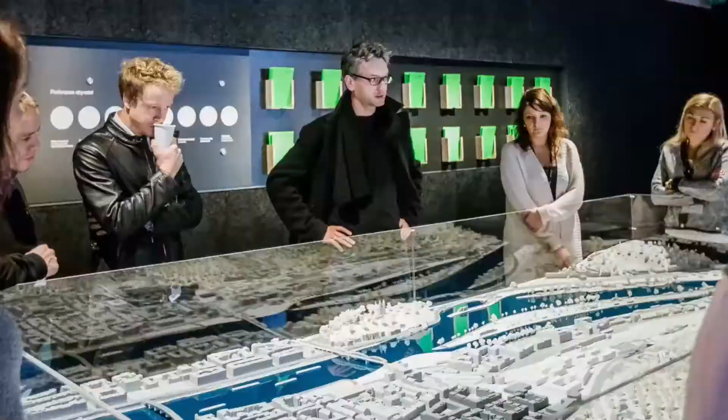Hello everybody, welcome to CAMP, welcome to another episode of Urban Talks. My name is Jiří Jaroš and I work here in the Center for Architecture and Metropolitan Planning in Prague. We have here another episode of Urban Talks, a series that is focused on architecture from all around the world. We are focusing on the projects of architecture studios and architects.

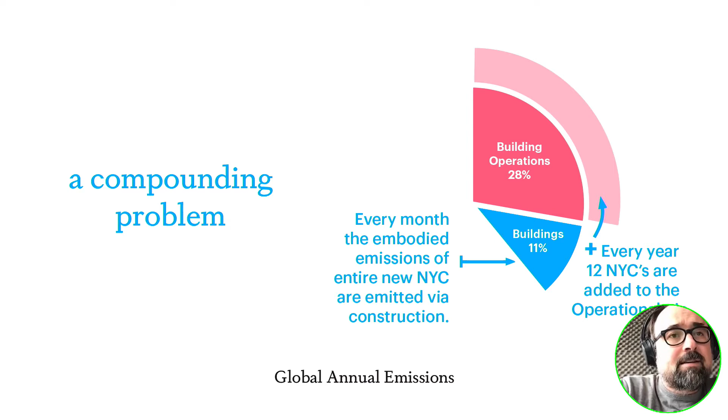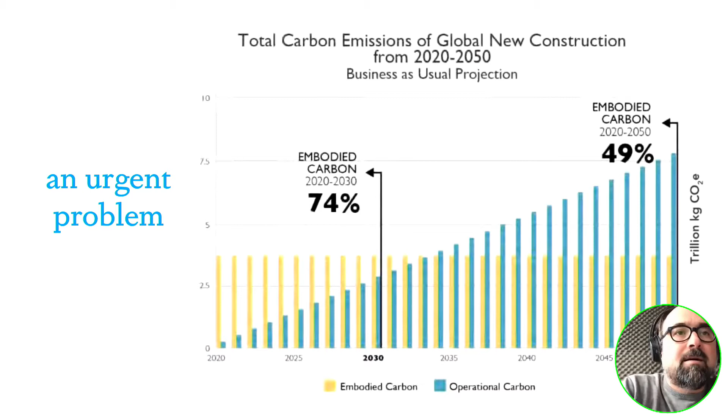It's also an urgent problem because this decade, we need to be really focused on this from a design perspective, because all the emissions that our building stock in the next 9 years will emit will be largely from an embodied side and not an operational side.

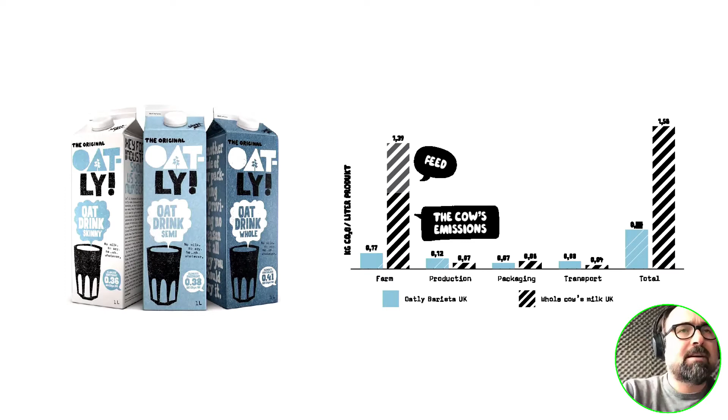We're equipped, I think, from the food culture. We began to see over the last few years kind of literacy around the impacts of our decision making. This is the oat milk I typically buy, and how it stacks up from an emissions perspective against a cow's milk, and where those emissions are happening along the supply chain.

And so now we're really beginning to see a building as a larger set of decisions, of which the architects and planners have the most agency at the cradle to gate and cradle to site part of this. This is before a building opens, before someone comes in there and operates it in a way that you didn't intend. This is where all our agency is.

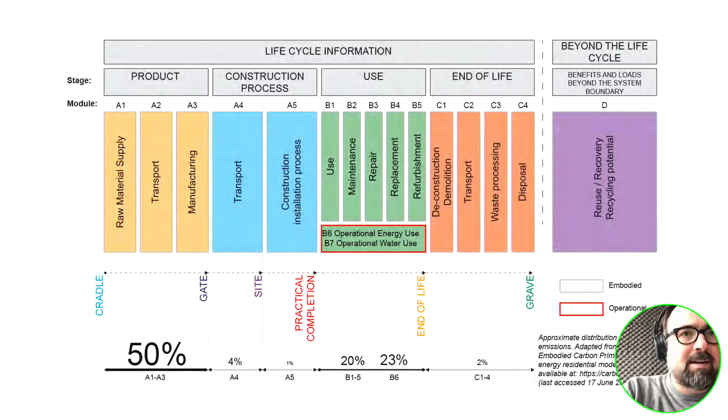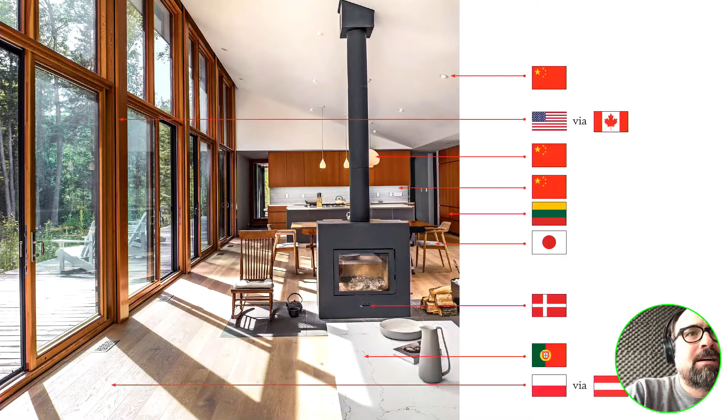And the more I begin to think about the decisions I made 7 years ago, the more I begin to see them in different ways. This is all the stuff that's on the inside of the cottage. None of it really coming from Canada, as you can see. A lot of it coming from Europe and China. From the outside, it's a wood-framed project. The kind of construction is typical of Canada. And I was curious, okay, it's 100% off-grid. That's good. But what is the embodied carbon of this project?

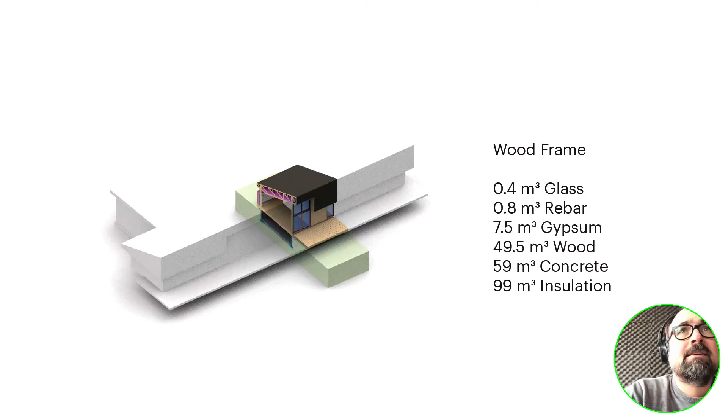And to do so, I began to pick apart this detailed model of the project, really understanding what it's made of, and then ran it through the analysis and found out, wow, this entire cottage is 92 tons of carbon. This is basically 92 of my lifetimes rolled up into this one building for my family, how much I would expend per year through my diet, should I live 92 years. So that's profound as you think about it as an architect.

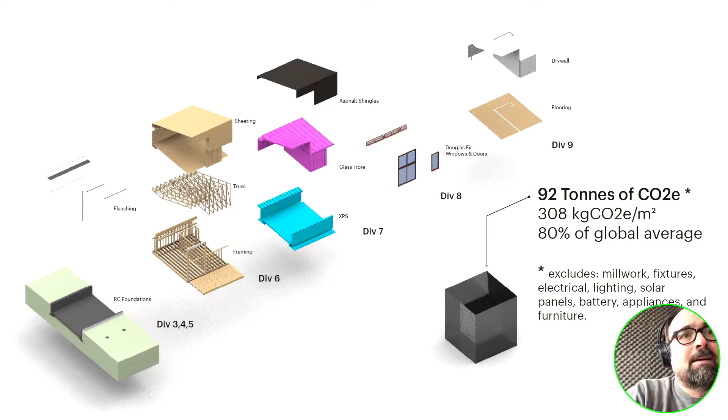And beyond that, only 10% of that was related to its structure. The majority of it was situated below grade in a crawl space that we don't even occupy, and I've come to reflect upon why I made this decision, and what I was taught through my education as contemporary best practice. And beyond that, 58% of it is made up of petrochemicals. This is really a disturbing fact when you think about the insulation to insulate the foundation. There are decisions I made I would certainly not make again.

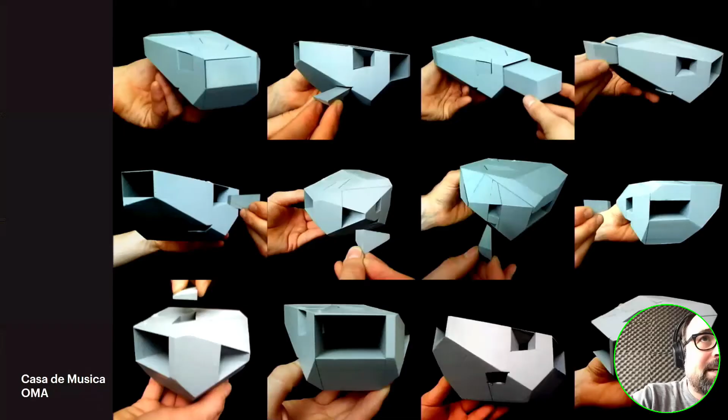And I've been thinking a lot about, when I was educated, a decade or so ago, what were the exemplary projects that I looked at? And this was my favorite project in grad school. And the way that this project was represented, and many of its kind, if you were educated in the 2000s like me, the blue foam model in the hands of Rem Koolhaas here was really symbolic of where architecture was at that point. And blue foam is now everywhere. Like it's penetrated our thinking, how we conceive our buildings, and how we make them.

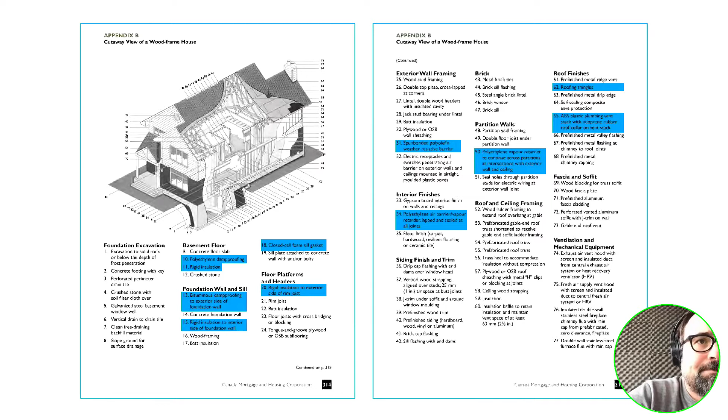This is the Canada Mortgage and Housing Corporation's handbook for construction, where of the 77 layers of a contemporary Canadian house, 11 of them are made out of petrochemicals. When we think about what actually blue foam is, this is blue foam. It's all these things. Sure, it comes with a decent U value or R value, but it also changes the climate, depletes the ozone, contributes to cancer, terrestrial eutrophication, and a host of other things you probably don't want to think about when you're specifying building materials.

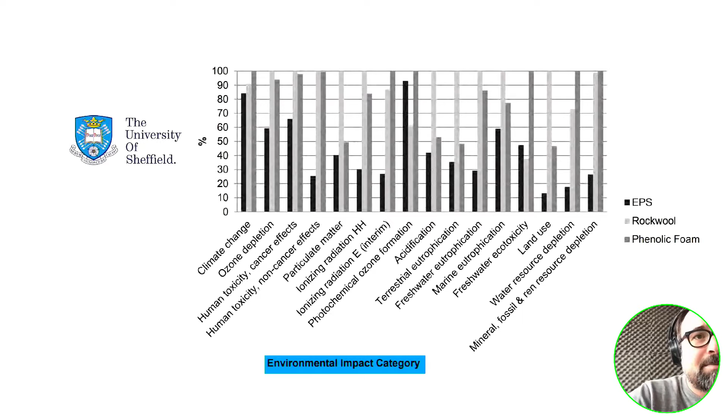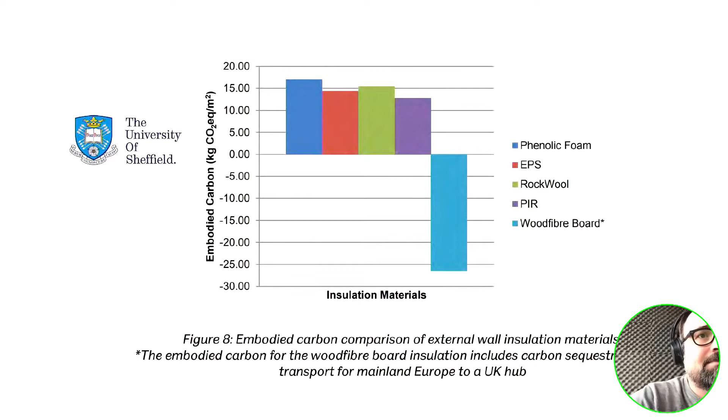And we also know we have alternatives. I mean, this is the kind of amazing thing. We know that there are better options out there, like in this case, wood fiberboard. We just simply don't make the choice or have not been informed to make it. Now, I think at MASS, we've been trying to figure out what is the right language and right way to think about this?

And we look to the food system, good, clean, and fair, and how that applies to building. I'll also talk a little bit about how that then applies to the two simple wedges of that pie, how we address our operational emissions through a return to passive systems, and how we reduce that construction pie with a return to a regionalism.

So good, clean, and fair for architecture. We believe everyone deserves good design. It's a fundamental right that the design is beautiful and just. It is essential to delivering human rights. And it's an essential service. And I think the pandemic over the past year has really illustrated to us the potential for architecture to potentially kill people, right? Or to allow people to get together with confidence. I think so much of our life now is lived outdoors because our architecture has not allowed us to be inside together and feel safe.

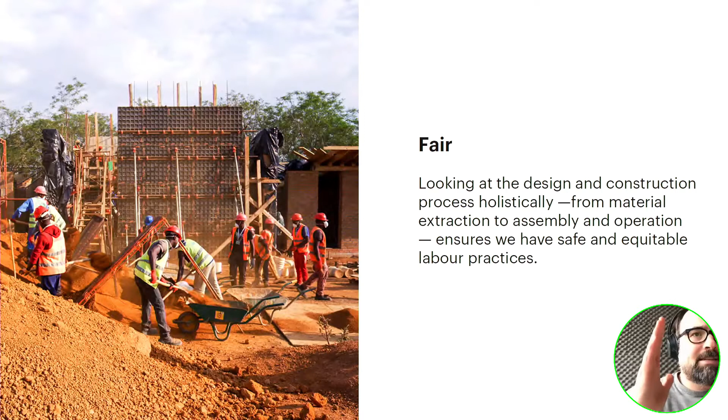Clean, that being climate positive is an imperative. Our projects strive not only for efficient operations, but the design of an entire supply chain to be resilient, restorative, and regenerative. And finally, fair, looking at design and construction holistically from the point of extraction to that of assembly and operation to ensure we have safe, equitable labor practices across the entire project and not just on the site itself. Now, I'll talk a little bit about the passive systems and then focus on embodied for the remainder.

When you think about where emissions live on this operational pie, to break it up into smaller pieces here, there's the direct on-site emissions, the things you do in your house, when you go home, if you've got a gas-fired boiler or stove, your air conditioner leaking, that is happening in your house and you have full control over it. And then there's the indirect offsite emissions. And this is basically, when you flick the lights on and the power, or if you've got your fridge and all the other things that are running in your house, they're inevitably drawing from a broader grid.

And then the question is, how green is your grid? And this is why I think national energy policy is very important when it comes to buildings. And you can see within it, residential makes up more than half of this, and that makes sense. The bulk of floor area is residential, and then the remainder there, commercial and other uses.

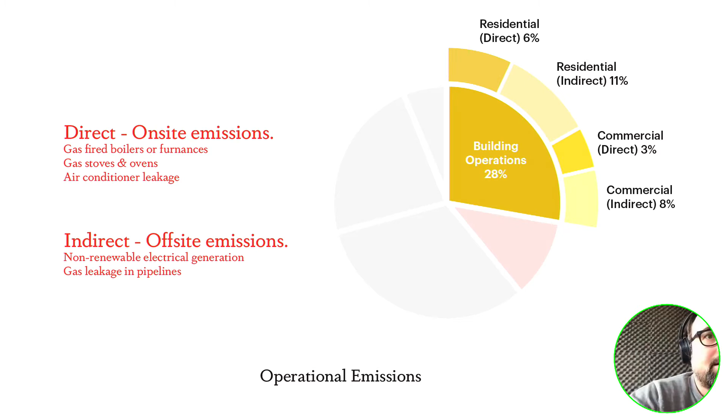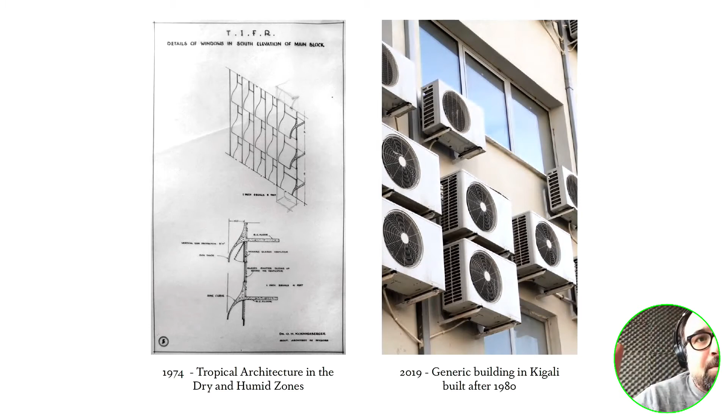And on the left was out of the AA's tropical architecture department, where it was looking at that age of this specific geography. How can buildings be designed? How can their facades mediate temperature and air quality and allow for buildings to breathe? And somehow in this period of time, architects have forgotten everything we used to know. And we've defaulted to sticking all these machines on our buildings, right?

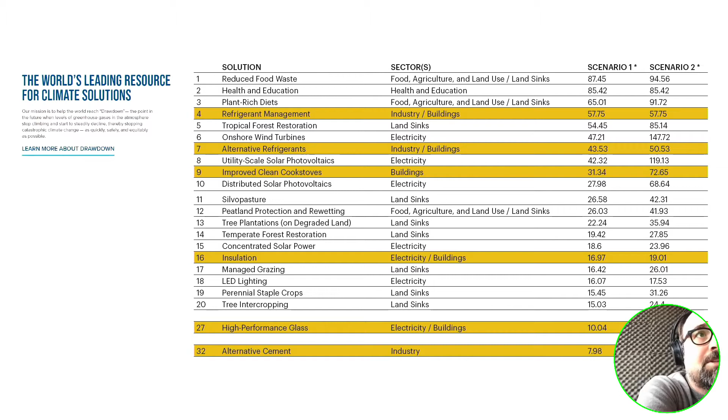This is a big problem because of the knock-on effect of things like air conditioners. This is from Drawdown, which is a pretty well-known publication of how we're actually going to tackle climate change. Refrigerant management is number 4.

And on the success of this project, we were asked to look at 29 other district hospitals. And we said, well, how about we give you some basic standards for these other district hospitals? We looked at all parts of the program and how they should be oriented and organized in the basic flow of patients and staff, et cetera, through them. This was intended to guide their procurement, to help the people hiring the future architects and engineers to say, here's the basic DNA for district hospitals.

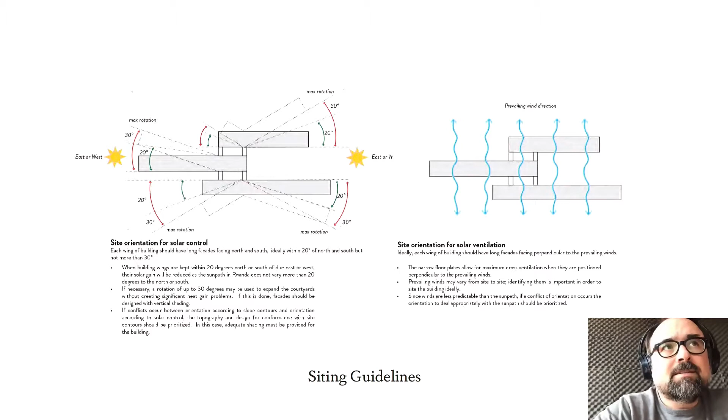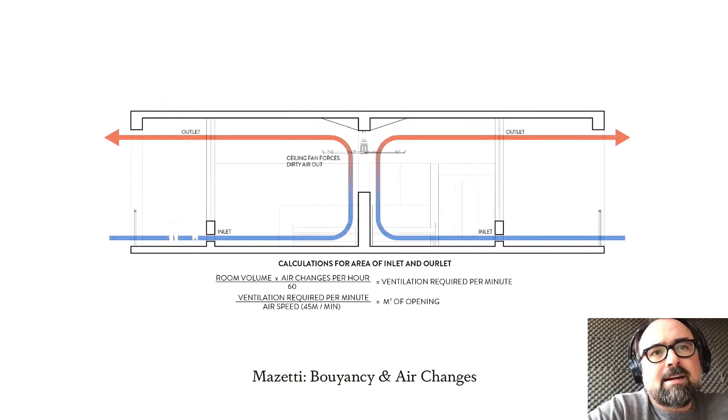So, how to organize to the sun, how to organize for natural ventilation, how to create natural buoyancy in the room and pressure differentials in a facade to get the air changes required in the case of, say, a power outage or not having electricity. And they then all asked us to test drive it.

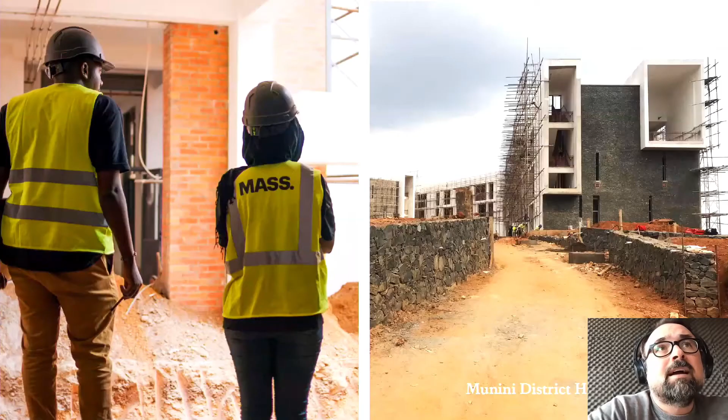So this one actually just opened last week. This is in Kigali, Nyarugenge District Hospital. These are photos from a couple months ago, a kind of proof of concept of this idea. And here's Munini District Hospital, opening later this year in a much more rural part of the country, basically taking this DNA and illustrating what it can produce.

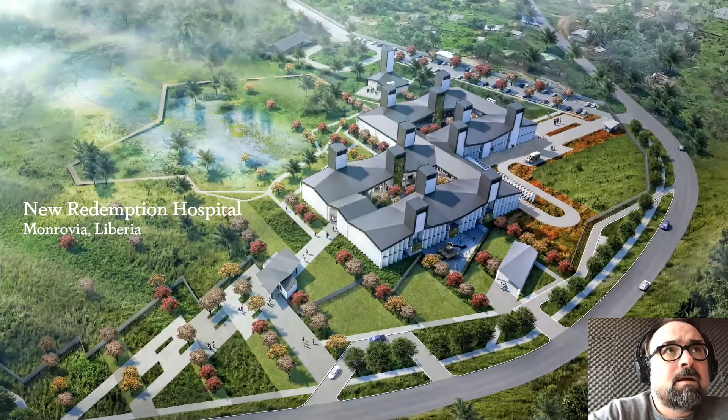We were then asked to come to Liberia, which is a very, very different climate than Rwanda. It's coastal, it's hot, it's humid, and it's very, very rainy. And we were given a wetland for a site too. So environmentally it couldn't be much more different from Rwanda. We had, again, the same basic premise, and how do you achieve it?

And here, working with Transsolar out of Stuttgart, we looked at the same basic first-principle stuff again. Where does the wind come from? At what times of year? How do we orient the building? How do we look at thermal comfort and the range of comfort rather than a specific temperature? How do we make sure that people, throughout the year, throughout a day, are going to be comfortable in a room?

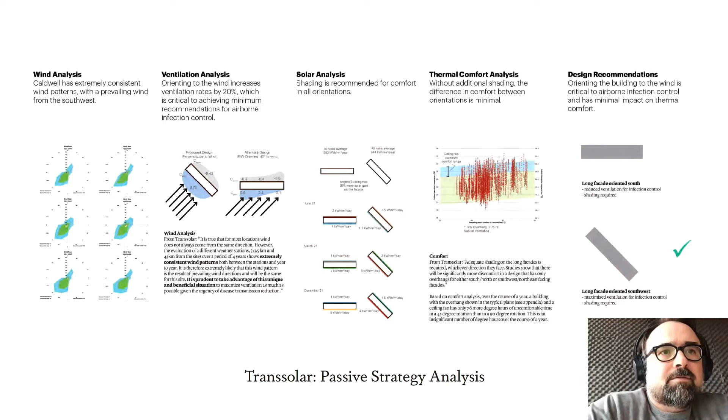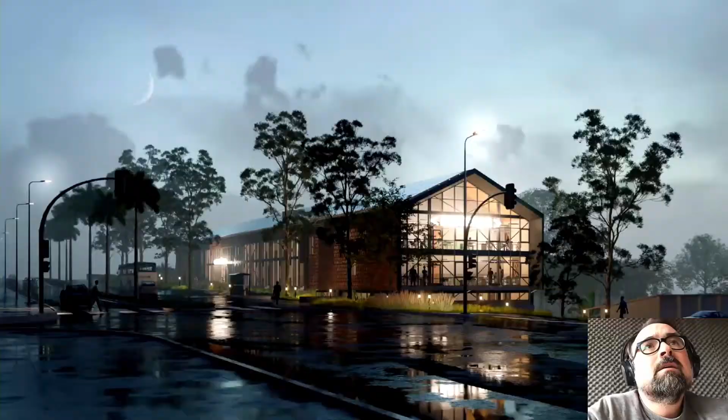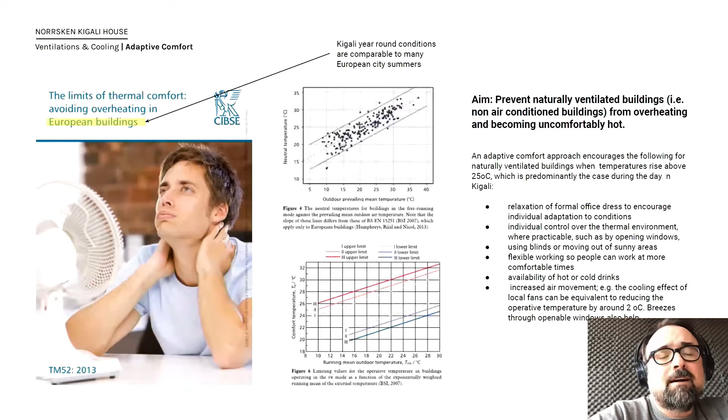Another project in Kigali that's currently going into construction is for the Norrsken Foundation out of Stockholm. It's a new innovator hub. And again, we're looking at how do we declare war on the air conditioner? We go back to first principles. So this is the thermal comfort range of office spaces, specifically the kind of spaces that people need within them. We start looking at what our general thermal cooling strategies are, what we can do through the envelope, through how the space is designed, ceiling heights, and also through the day and the diurnal cycle here.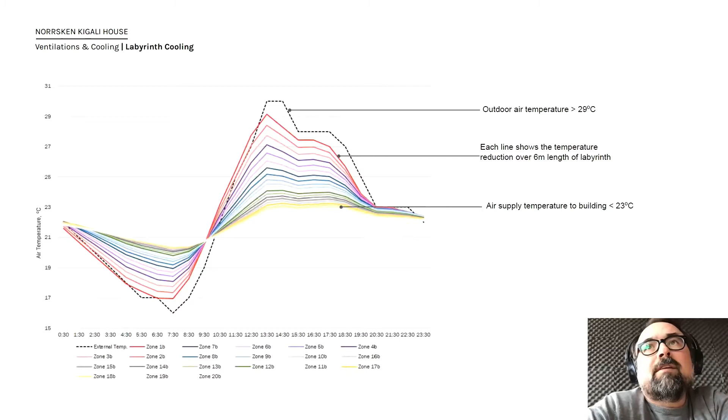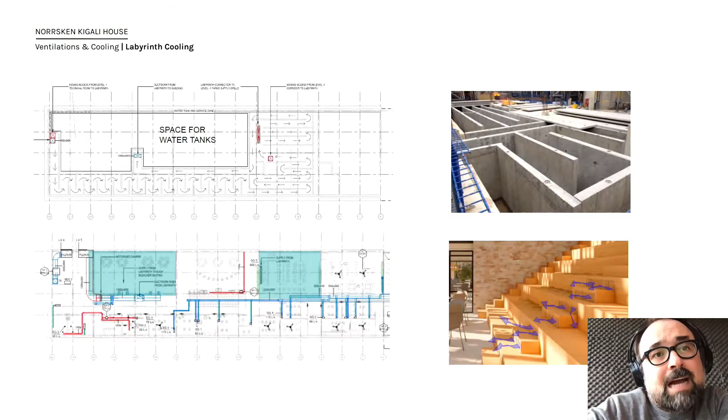At what points can we begin to shrink the indoor air temperature into that human comfort range through design? And ultimately, we went back to looking at the foundations as a way to do it, through this thermal labyrinth where air is brought in through the basement and circulated through the foundation structure, and then it cools off naturally in that underground space and comes up into the building pre-cooled. So natural air conditioning. And looking at the building itself, the cooling system, the air conditioner that is supposed to be on the elevation, is out of sight in the basement.

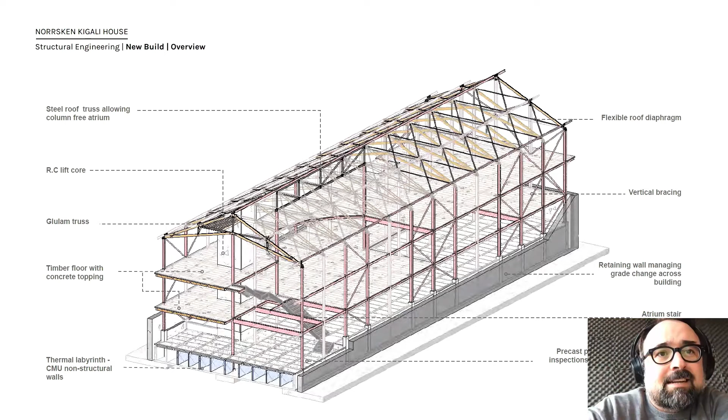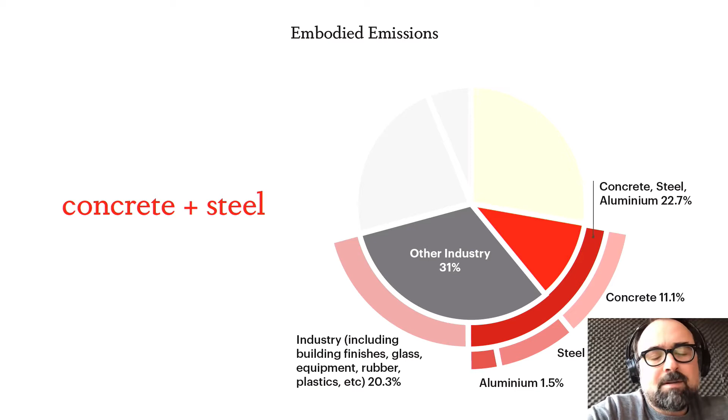The last topic here then will be focused on embodied carbon and this idea of a return to regionalism. So, embodied emissions, that piece of the pie, expanded a bit more to account for industry itself, because buildings are a part of it, but to really tackle climate, we need to look at 3 materials specifically. The first is concrete and cement. As a country, it would be the 3rd largest emitter by itself. Steel, rebar, clearly a big part of concrete as well, and aluminium, which you'll see in some later examples is in a lot of our facade elements in contemporary construction.

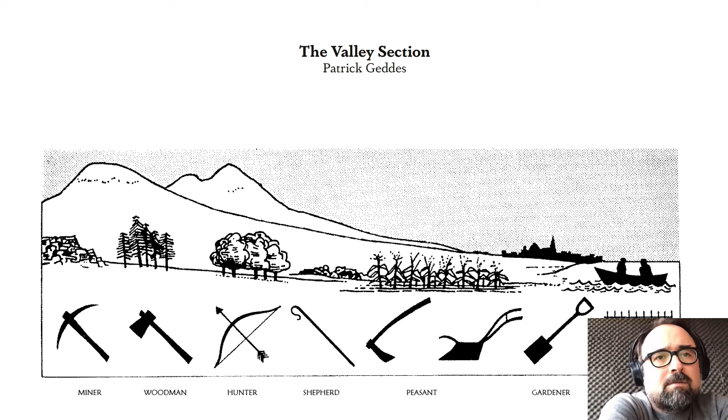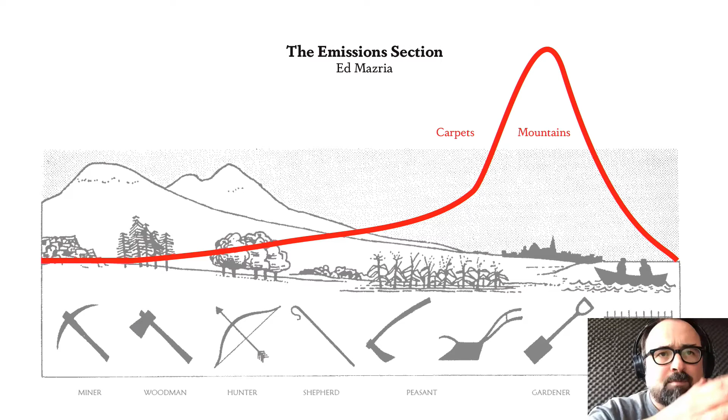Going to update this to Ed Mazria of Architecture 2030's talks on emissions, where in the current emissions profile of buildings there are mountains in our downtown centers, where there's high rises and commercial density, and then it's more of a carpet as it goes out to the residential area. Taking these two things and putting them together, beginning to think about how we actually get to zero: one, we need to green our mountains.

We need to be thinking about how we change how our high rises are currently configured, and really change their use. If you think about it, I live in London, how many buildings down at Canary Wharf have been sitting empty or half empty for the last year, but the lights are still on? That's the emissions mountain. Our carpets, our housing: how do we change our neighborhoods and our current housing to both reduce our operations, but also be greener and potentially a carbon sink?

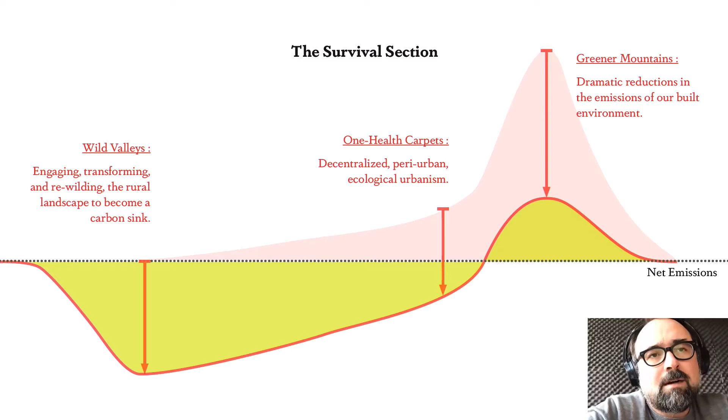And then the valleys: how do we engage the rural landscape? How do we bring back nature to the broader landscapes around our cities? Now, the first project that got us thinking about this is a school in the middle of Congo, the most remote part of the world I've ever been, where to get there required you to take 3 flights, land on a grass strip, and sit on the back of a motorcycle for 4 hours through the jungle where the path is about as wide as your shoulder in parts. So from a constraint perspective, you could not ask for a better project.

It resulted in thinking, while we're building this school, getting materials here is incredibly difficult. So we want to make sure that what we leave, the people can repair and maintain and learn from, right? So we spent 2 weeks there talking to them: what do you work with? What materials do you use? What are your skills? And then took a bunch of materials back and tested them in the lab to figure out the right building materials for the school.

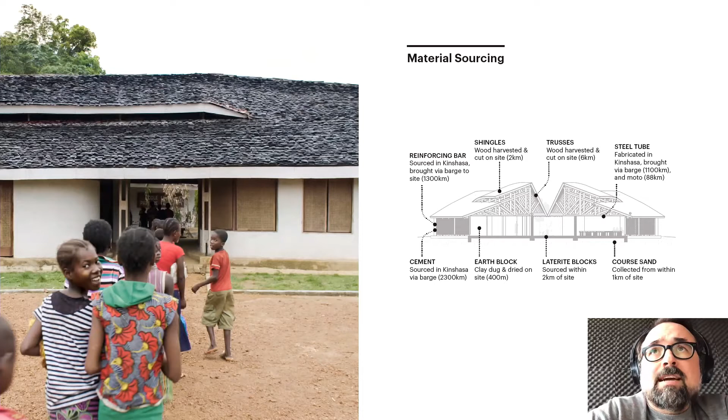Here you can see what we did use: we brought in some cement, some tools, some nails and screws, but most of the project was harvested within 10 kilometers of the site itself. Of the species of wood that we found, a lot of them hardwoods, we did a lot of studies, and we found that one in particular was perfect, had a lot of tannin, like a cedar, for cedar shingles, which you'll see in a second.

These are hand cut, on-site fabricated trusses. Here are the shingles I mentioned, which have that same character as cedar. So in the event they need to replace the roof, they throw on another shingle as opposed to waiting for some sheet to show up months later. And the impact of this from a socioeconomic perspective, in a country notorious for a lot of the money funneling its way to Kinshasa and a few pockets, is that the bulk of this project was spent immediately locally, where 84% of the construction budget made its way into that community.

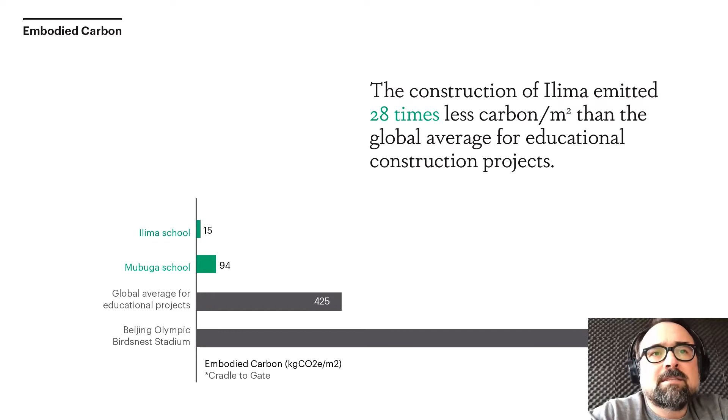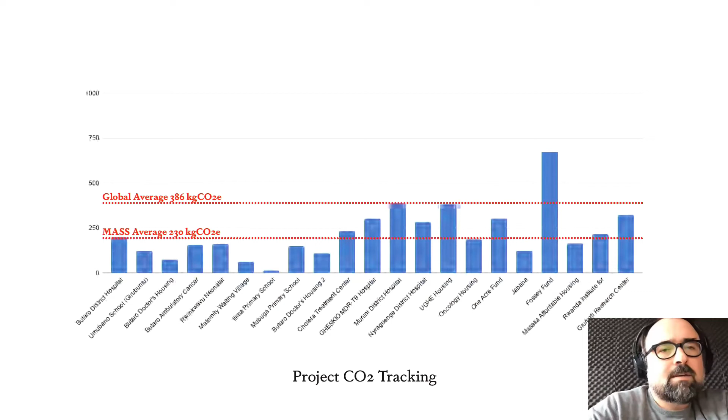From an embodied carbon perspective, as a result, this project is embarrassingly skint compared to the global average, with the Beijing Olympic Stadium put there as a comparison. And it makes sense: if you're building out of mud bricks and wood, it ought to be quite low, right? The source here was the cement and some of the foundation mortar. Out of this, doing some work with MIT at the time, we began to look at all our projects. How are we doing across the board? How can we improve? Which projects have performed well, and which have not, so that we can learn lessons to apply on others?

Now, the project I've been focused on for the last couple of years is the Rwandan Institute for Conservation Agriculture, where this has been learning from Ilima in many ways and trying to figure out how to take these lessons at a much bigger scale.

The first thing we did was, okay, how do we reduce carbon radically in this? And the biggest savings was going to stone foundations, something I've thought about a lot since. Like, why do we just assume foundations need to be cast concrete? We've been building out of stone for centuries and centuries. And then suddenly in 1930, we said that's not good anymore. So by going back to stone, it had the biggest profound cuts in the overall embodied carbon.

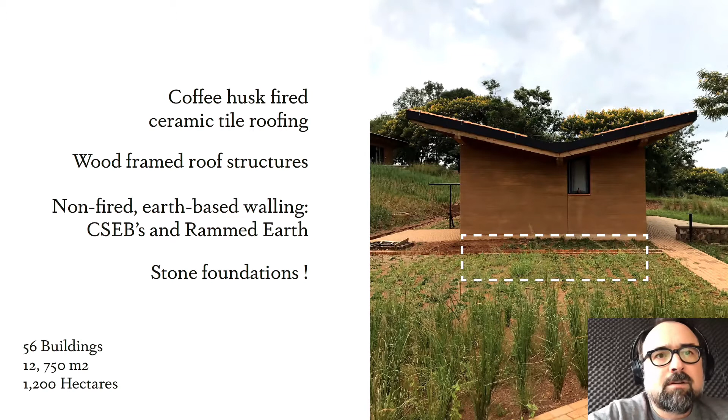Wood framed roofs, coffee husk fired ceramic roofing. This is an architecture literally harvested from the site. Our engineering team spent time, for the rammed earth and the earth blocks, digging holes on site, finding the right mixtures of clays and soils to get the recipe right, so to speak. So this is all on-site sourced material, and then they're kind of testing here.

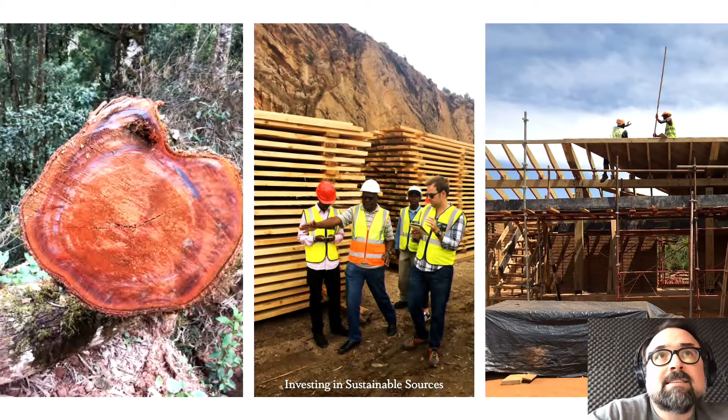We're working with a few lumber suppliers across Rwanda and Tanzania, like what species do they have? What dimensions can they cut? What's their drying time? To think about how we design around the constraints of the supply chain as opposed to the other way around.

And from an EPD perspective, these are environmental product declarations. This is a Swedish group that does a few of them. And you can see a lot of our projects are in parts of the world where these do not exist. So these are the coefficients that you assign to a material to figure out your footprint. So, in the absence of data, we've been working with our manufacturers to create the data.

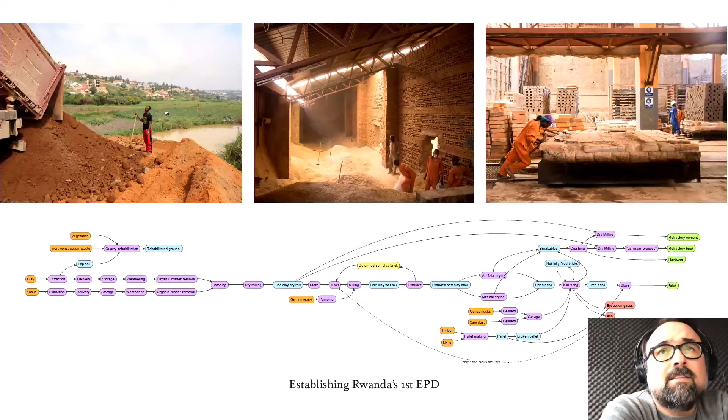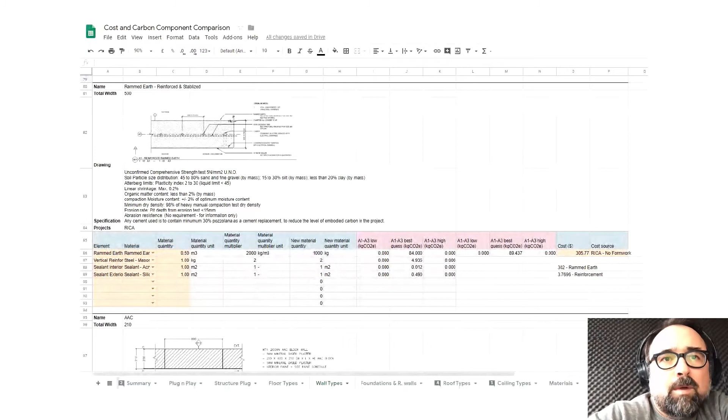And so here is an overview of the supply chain of Ruliba, the big ceramics company we've engaged in this project, and others to understand their whole supply chain and where emissions happen across it. And then take this and roll it into our own little custom spreadsheet to think about how then we can bring this to other projects and get everybody thinking about this on the design team.

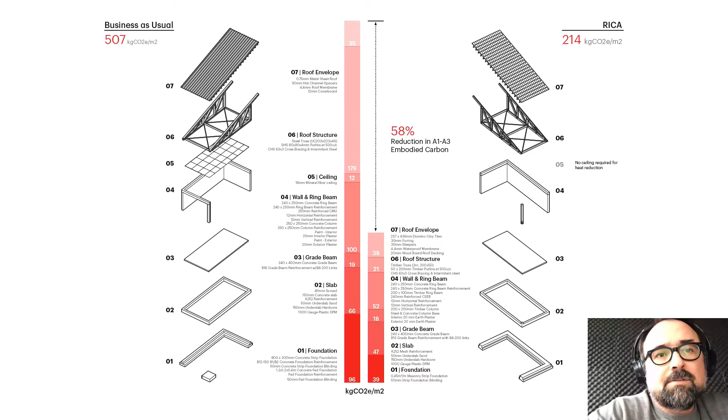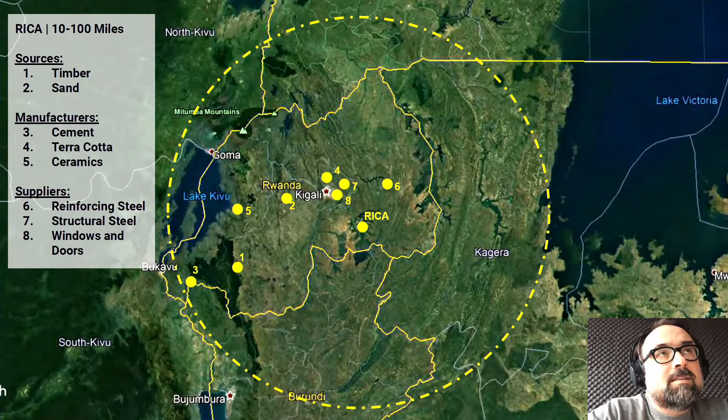96% of this project's material are extracted, harvested, sourced in Rwanda. And Rwanda is the size of the Netherlands, for context. Within a mile, we got all the big heavy stuff, the soils, some of the timber, the water that we're using. Within 10 miles, the stone, the aggregate, the sand. At 100 miles across Rwanda, we're getting into things like the cement and terracottas that you saw before, and some of the other items that we could specify in country.

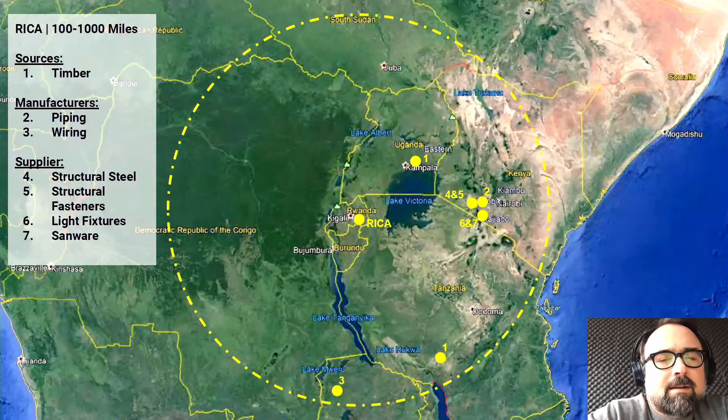At 1,000 miles, this is where we're reaching out to Kenya and Tanzania and Zambia for some of the wiring and hardware. Things are not manufactured in Rwanda. And then finally, globally, we're having to go to China, the Middle East, and Europe for things like the wastewater treatment plant and the solar PV.

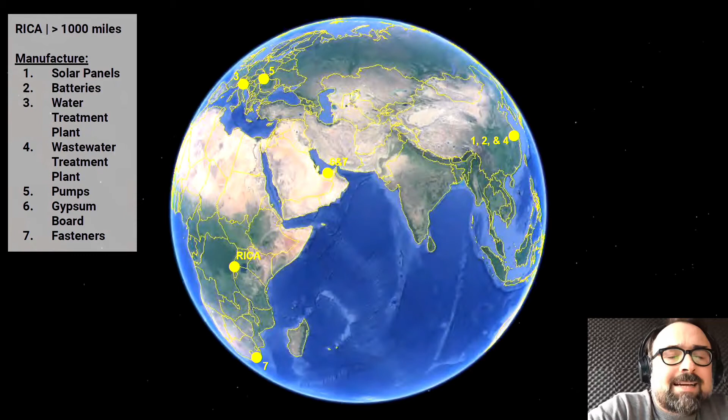98% of the labor sourced within 100 miles. So of a $60 million capital project, again, this is how to make sure that you're having impact. Looking at that, we hired basically every able man and woman in the district through this project, through the construction. At any point, we've had upwards of 900 people on the project site at a time.

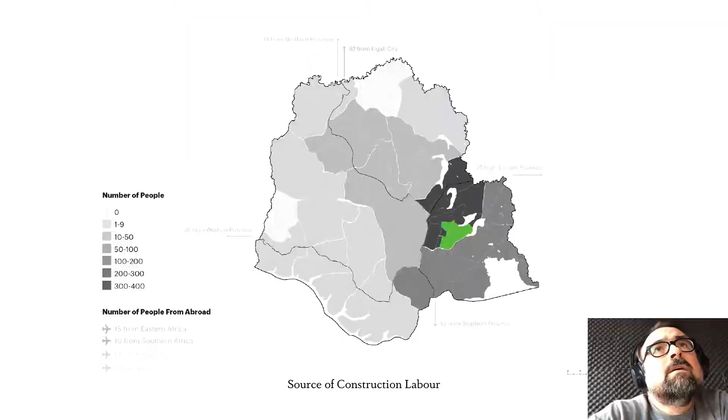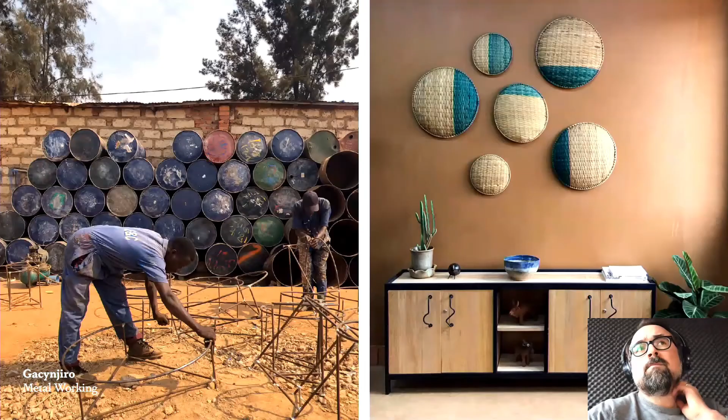We reached out to the metal workers to do custom little hardware details and frames and things for the furniture. And finally, we made our own wood shop. We hired a couple carpenters to do a lot of the desks and chairs for this university. So here you can begin to see what it looks like on the interior.

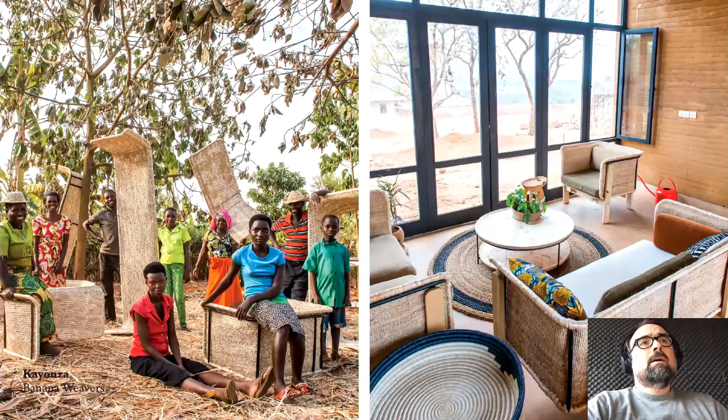And this is a banana weaver cooperative. So banana fibers, there's a lot that comes off the plant besides the banana, more than the bananas, and taking this and incorporating it into the residential furniture suite.

To think about, okay, how do we get to net zero? How do we actually get to climate positive? We've been working with Atelier 10 out of London to think about what the total footprint is. So we had a good sense of what our buildings were. We have a good sense of what the infrastructure is, and that's all of the carbon associated with the construction of the roads and the solar PV system, the landscape, all of the paths and the stone and the things that are laid into the landscape.

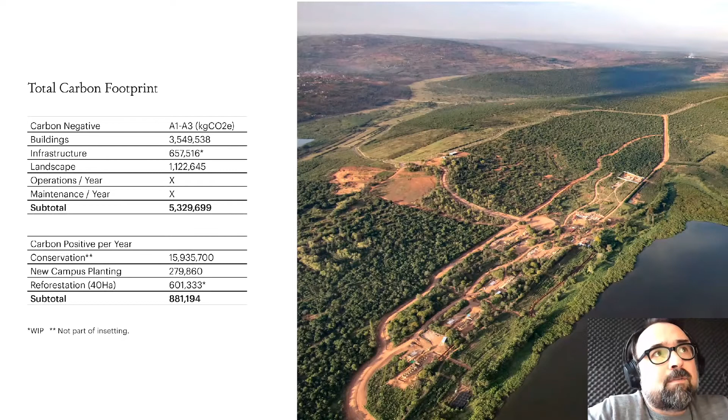And then because the campus is entirely off-grid, the operations budget is basically zero from a carbon perspective. It's a completely off-grid project from both a power and water perspective. So we have the benefit of 1,200 hectares to then think about how do we get positive. And we're developing a reforestation scheme where we plant 40 hectares. And over this decade, think about how do we get to neutral and how does it become positive thereafter.

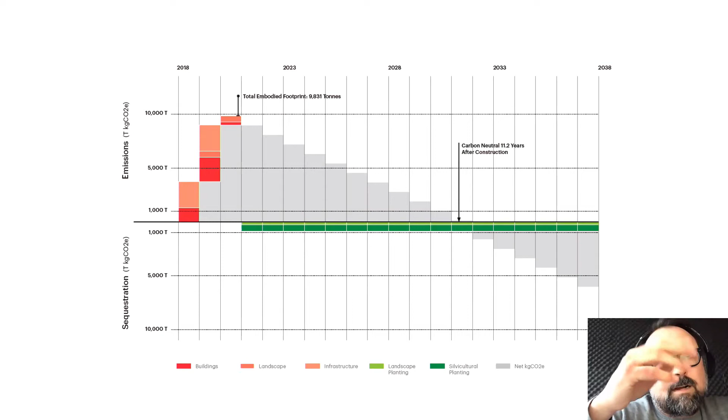So here you can see this kind of stacking of the footprint in the positive direction through the phases of the construction. And once the reforestation scheme kicks in, per year, you begin to sequester a certain amount that takes that down and steps it down. And so this, albeit on a project site where we have the area to do it, this as a diagram is really how I think we need to be thinking about architecture and finding that green space and developing relationships directly to it, and not some abstract offset that we spend $5 on, but actually figuring out exactly where that's actually going.

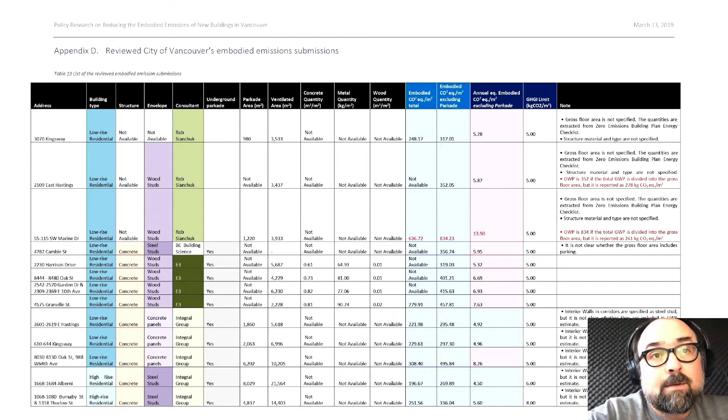What Vancouver did in 2018 is basically go out and produce a benchmarking study. It looked at 50 or so projects built in the city, to answer the question, what are they building right now? Like, we need to get to half. Okay, what are we doing today? Right? We need a target to measure against.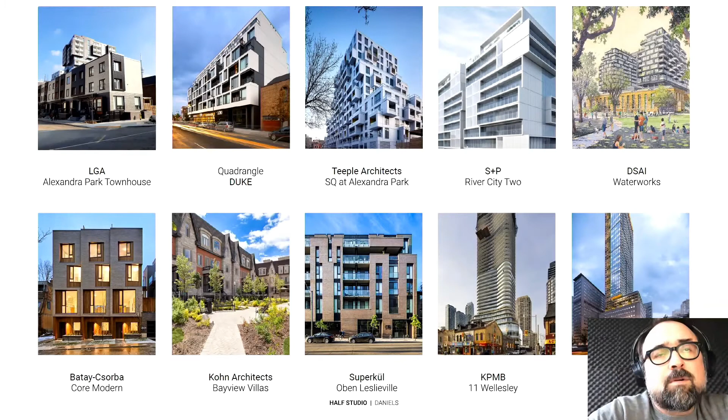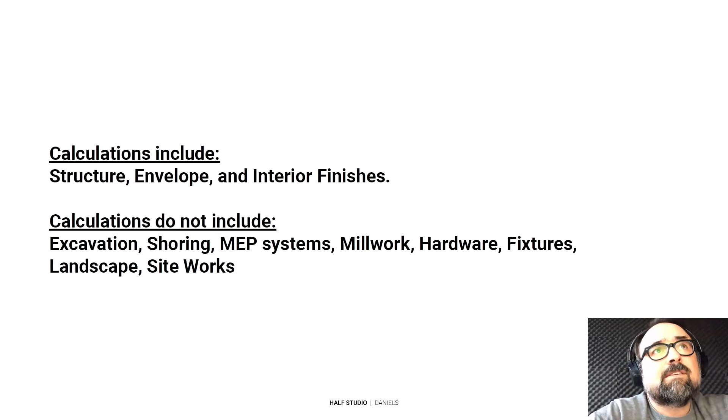So I enlisted 10 firms in Toronto to offer contemporary projects, either in the ground or recently completed, to answer that question, what is right now, so that students can then understand where they're moving from. We worked with them to develop full bills of quantities and pick the buildings apart. So the calculations include the main things like the structure and the envelope, interiors, but did not include MEP systems and a number of other things.

So it's an incomplete accounting. But the results were really interesting. I'll be sharing this with the City of Toronto and Canadian architects. And it's a kind of form of construction I can't imagine is all that different from Czech. So we found that the low-rise projects built out of wood frame were roughly half per square meter of the projects, mid-rise and high-rise, built out of reinforced concrete frames.

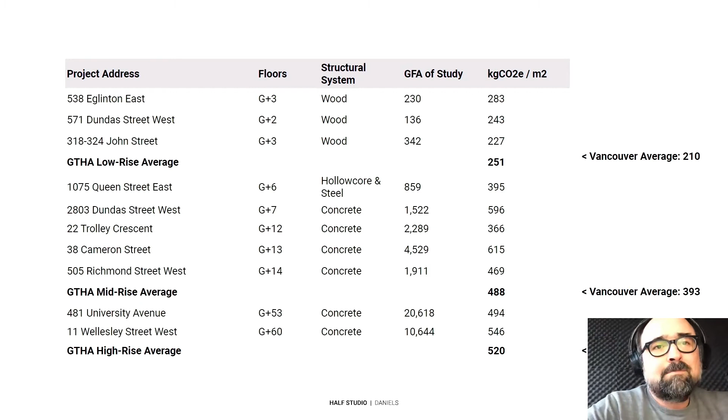So if there was something you wanted to do right now to save the world, it'd be like, build more lighter, lower buildings. That would be a kind of simple thing based on the technology we have. And kind of getting into the weeds of it, the key findings, which I've shared with the city and am now going to share with the broader country and now sharing with you, are like four main drivers we should look at from a planning perspective and as designers where we can focus some attention.

And the first is carbon intensive structural systems. This is really straightforward: cast in place reinforced concrete, because of cement and because of the rebar in it, is a huge driver of emissions in all these projects. And like I said, the lower rise projects that had wood frame had roughly half that of their counterparts. So, I recommend talking to your structural engineer, thinking about how to make your buildings lighter, reducing cement as much as possible, and looking at alternative structural systems. We're talking a lot about mass timber these days, and this is one of the reasons why.

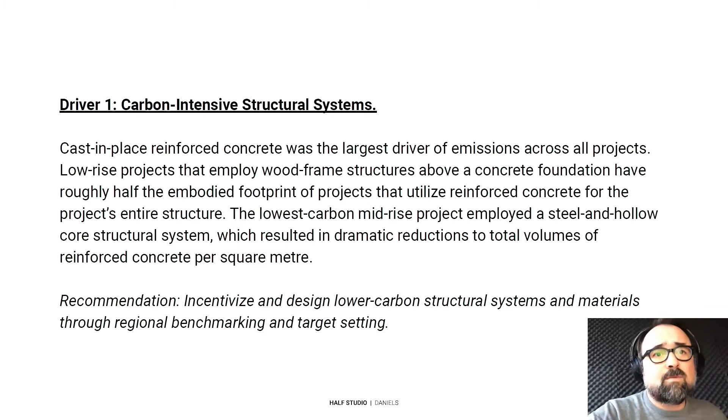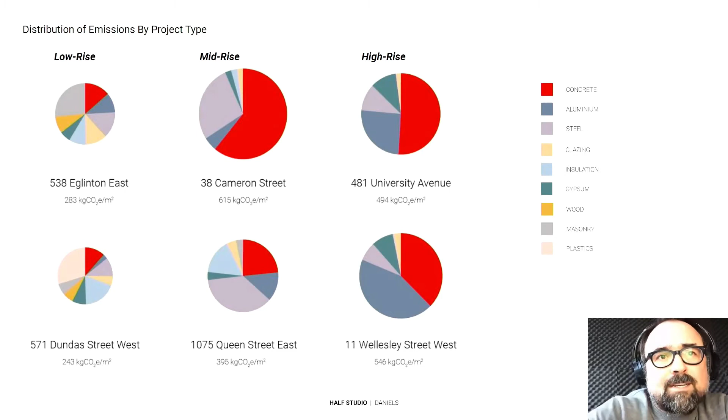Looking at a few of the buildings and proportionately where emissions live, and you can see, we'll get into a few of these here, but the concrete, that red, it sticks out at you. You can see, in a couple of these projects, the one Cameron Street project, the majority of the project is concrete. After that, aluminum and steel, and also in some smaller projects, insulation.

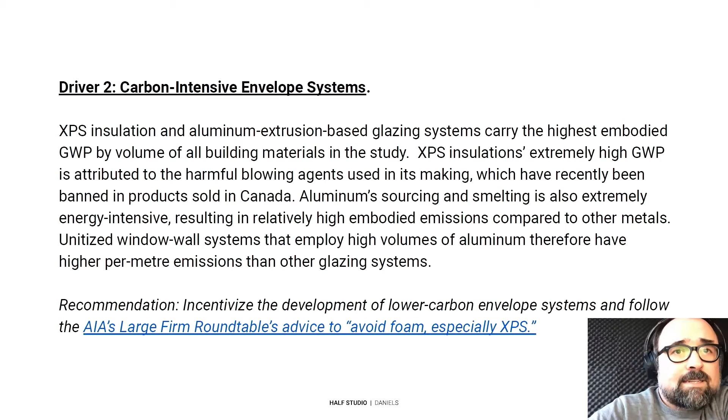As architects, we are completely in charge of envelope. So envelope systems are a big source as well. And so XPS insulation, the North American versions of which had been abhorrent until recently in Canada, when the laws were changed to follow more European standards. And aluminium wall systems. So there's a lot of window wall systems in Toronto and Canada, and curtain wall certainly uses a lot of aluminium. So the sourcing and smelting of these materials is energy intensive, albeit they could be recycled, but they are a problem from an emissions perspective. So, the recommendation is, get this foam out of your buildings, find organic sources for thermal comfort, for insulation systems, and let's figure out ways to cut the amount of aluminum in our wall assemblies.

Subgrade floor area, and this is probably more for the planners in the audience. I would love to know what the parking requirements are in Prague or in the Czech Republic more broadly, but Canada has this fascination with digging basements. I grew up with a basement. I just thought every house had a basement until I moved to London and realized no one really has them here. But foundation works and parking structures and anything that's been pushing people into the ground architecturally in Toronto is a huge, huge source of emissions.

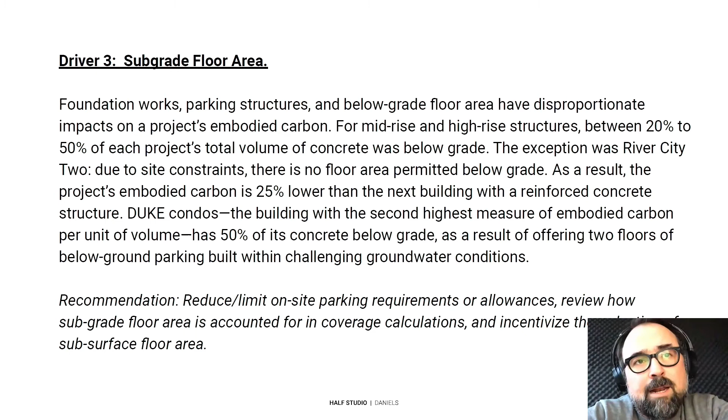This is largely due to on-site parking requirements and floor area ratios. So I imagine there might be something similar, but basically in Canada, any floor area below grade is not included in your FAR accounting. So you can go as deep as you want, kind of, without being penalized. It costs more, but that's typically where people put their parking.

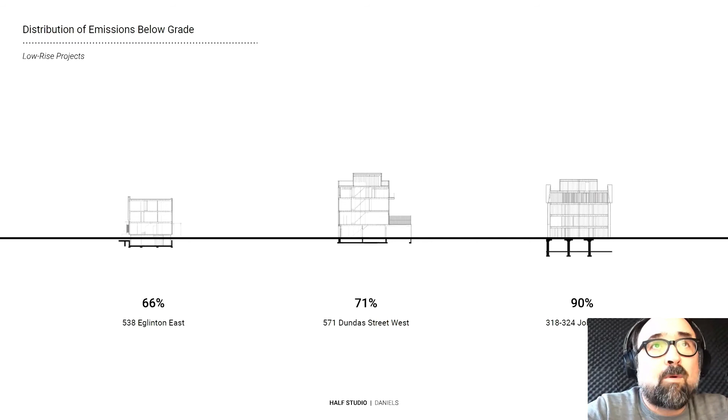Now, looking at a building from an emissions profile, what's interesting is these 3- and 4-story wood frame townhouses. The bulk of the emissions are all in the foundations, these concrete foundations. Again, it's disproportionate. It gets even more out of whack at the mid-rise, in a couple of these projects here where the soil conditions are a bit more difficult, where half of the emissions are in the parking garage for a 7-story residential building, right? Where just to house our cars, we're emitting just as much carbon as the house itself.

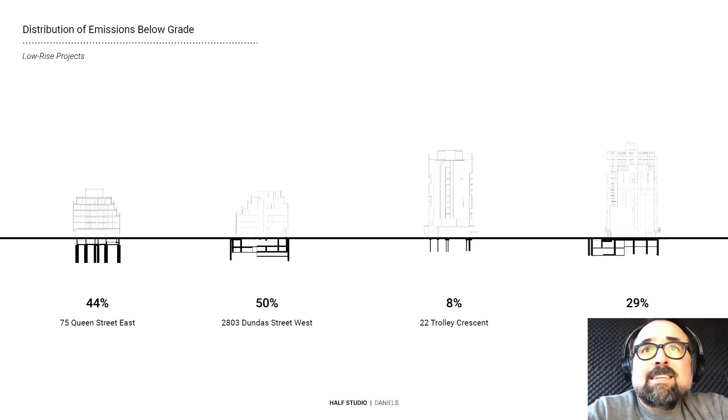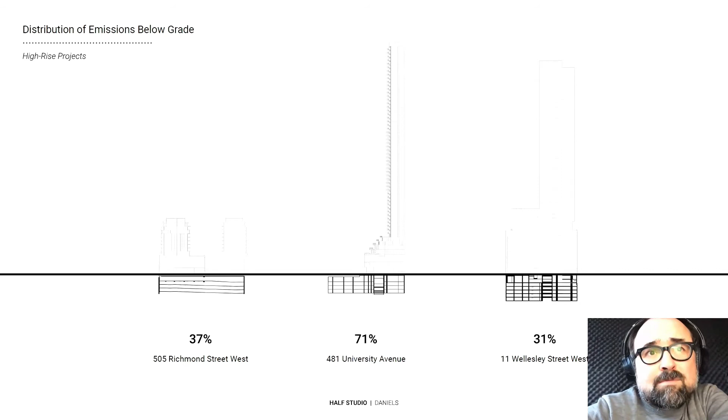The one project that didn't could not go down for some site constraint reasons. And then the high rises, again, you see these large parkades below ground to accommodate all the units above ground. And from an emissions perspective they are kind of icebergs.

One student was just like, well, I'll just get rid of the parking and we've met our 2030 targets. And she was pretty much right there. So that would be the easiest thing to do.

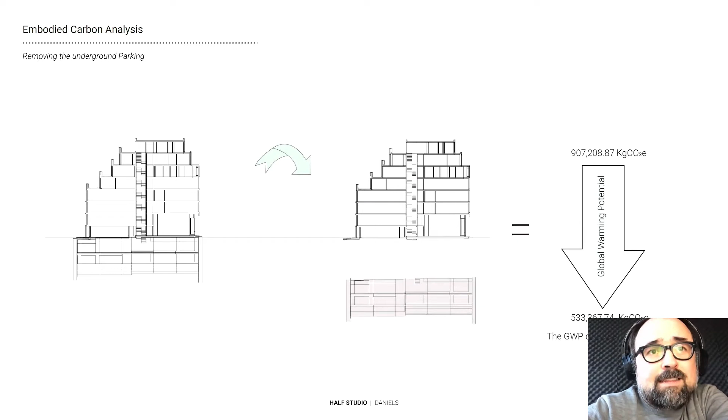And the last is the dimensional impact of parking, which is, the parking grid does not necessarily match up to the residential grid. So in this project, you can see the parking grid is a 5,500 grid and the units above are on a 64. And so to accommodate that change in grid, the whole ground floor slab is a meter thick transfer beam, 14% of the project's total emission, once again, just to accommodate parking.

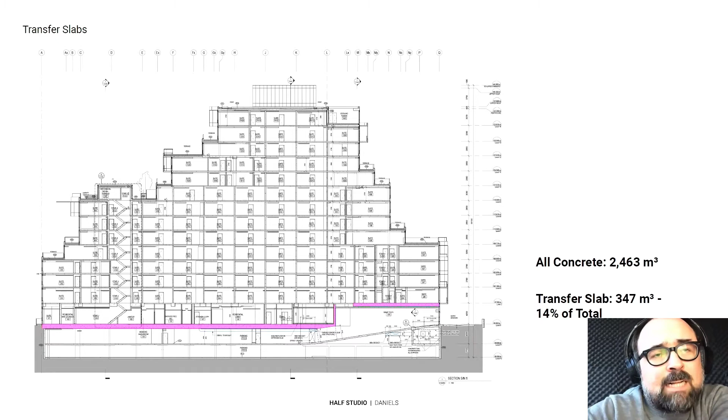I think it's pretty impressive how deeply you are focused on sustainability and emissions, especially the last thing about the ratio in terms of garages. It's very interesting. Also in Prague, we have that rule that if you build a residential house, you have to provide a parking space for every flat in that building, which means that if you build a 6-story building, you will build 3 stories of parking for those people, which means that half of the price of the building is just for cars.

Parking spot. Yeah, but of course we are in a crisis if we talk about residential houses, about living for people, about the flats and apartments. So that's quite interesting.

I want to ask you about the reusing of materials. You showed us that in Africa you can use different materials, and you teach people to use different materials. What do you think about reusing concrete? If you build a typical development in the city, for example, an office, and you reuse some old concrete from an old building for a foundation, do you think that this is enough? I think it's just an experiment for now.

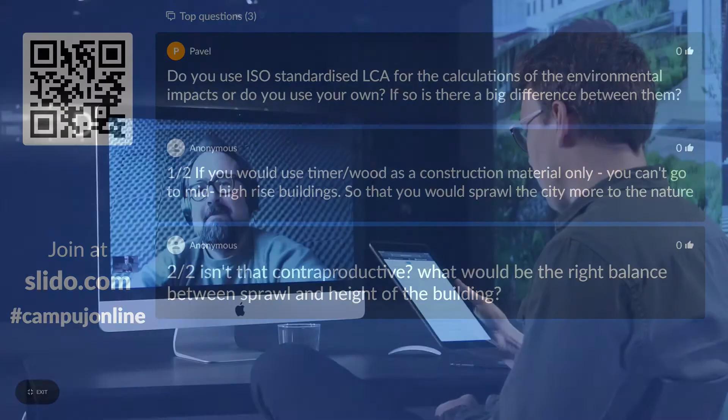There's another question. It's simple. Three main differences between the First World and Africa, and what is better in Africa in terms of being an architect and creating there? Three differences.

I take objection with the basic framing of the question, but I'd say, okay, practicing in Rwanda versus practicing in Canada. I'll reframe it that way. So, the best thing about practicing in Rwanda: it taught me everything about architecture that I never knew, and told me that I needed to completely relearn what I thought I knew, because it put you face to face with your decisions. When you're sourcing something where you actually know who's making it and you're thinking about them, you design differently.

I think that was the first great advantage. My supply chain wasn't this abstract thing I didn't think about. The second thing was the weather is perfect. So you didn't have to worry about insulation and air barrier. You just had to worry about how do you get as much air going through this building at all times. The tropics are liberating in that regard from an architecture perspective. So that was nice. And I think the third part was just the culture of the practice. It's a really young, energetic, exciting place to be, with a lot of different nationalities and a lot of young Africans. So that would be the third part.